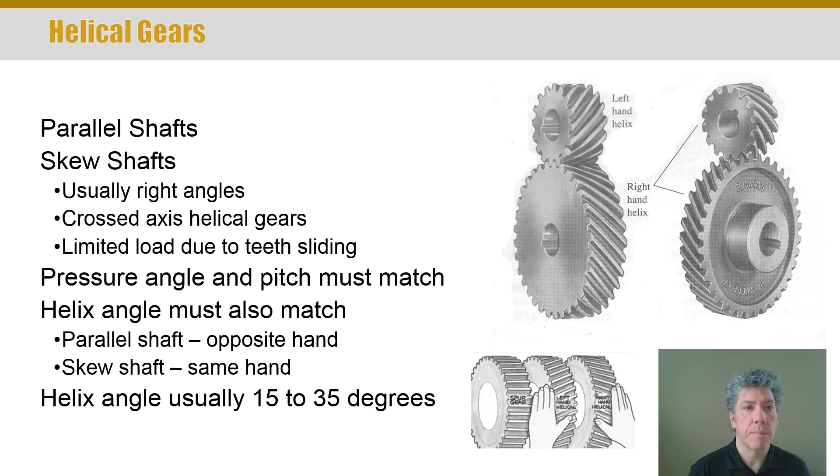Now, some of the advantages of a helical set: number one, you have a higher contact ratio, meaning there are more teeth in contact at the same time. This should make sense—if you consider the helical gears on the previous slide, some of the teeth actually had part of the tooth in mesh and part not yet in the mesh area. The high contact ratio just means there are more teeth in contact. And because of the way the teeth are angled with respect to the gear body, the pressure or force is applied from one tooth gradually along the face of the tooth.

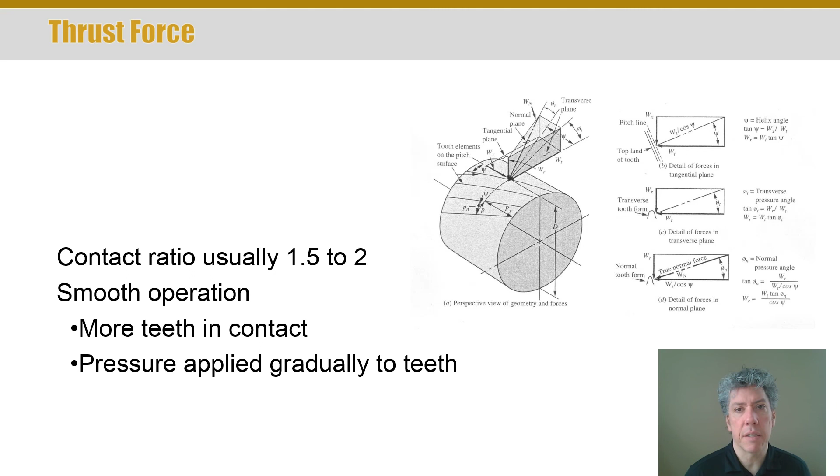So this is a huge advantage. Now it does result in a problematic byproduct: the angle of the tooth causes a force on the gear that makes it slide along the length of the shaft. That's problematic—we don't want that to happen, obviously. One way to overcome this is to simply include two separate helical gears in one body with two separate handedness—a right hand and a left hand—so that the thrust forces cancel out.

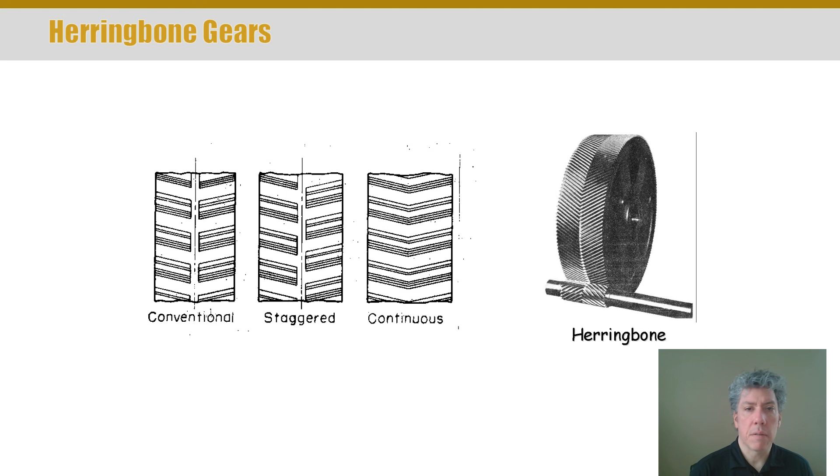These are called herringbone gears, and those were the types of gears you saw at the beginning of the slide, the picture of the very large gears. There are conventional herringbone gears, staggered, and continuous, and depending on the application you can choose what you need. Continuous is the most difficult to make because getting into that point in the middle is hard. Staggered gives you a bit more advantage in terms of smoother contact and engagement between the teeth. Conventional just makes two separate helixes and puts them together essentially. So that's herringbone gears, but they're not especially common.

Let's consider the forces on the helical gear teeth. This is a really important figure to wrap your head around. What's being shown here is the body of a gear without the teeth themselves—they're just lines on the surface of this cylinder to represent the teeth. Now remember that we always put oil between gear teeth, and so the gear teeth can't have any friction forces.

So this is the normal plane. It's pulled off down here at the bottom. And if you were to look at this plane straight on, or square to it, you would see the true normal force—that's that dashed arrow in the middle of the rectangle there. And notice that it is at an angle, phi. Now that phi has a subscript n, and that is called the normal pressure angle. So that's an angle in the normal plane, so it's a normal pressure angle.

Now the part of what we care about is the horizontal piece of this. Okay, so if we take the normal force and break it up into horizontal and vertical components, we'll get a radial force, and that radial force tends to push the gear away from whatever it's meshing with. And then we get a horizontal piece that is almost what we want. Now notice this horizontal piece is not exactly in the direction we want. There's a component of this horizontal force that tends to generate the axial force. And part of this is the tangential force, which is the whole point of having the gear in the first place. But there are some equations here to relate the tangential, normal, and radial components.

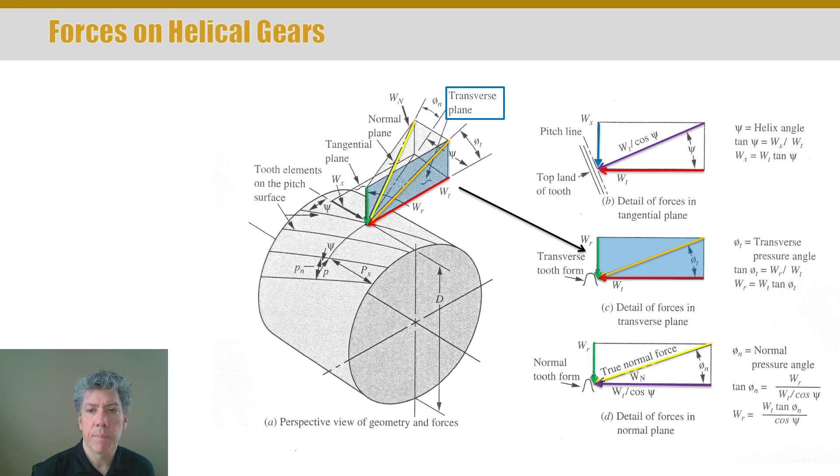Psi is the helix angle of the teeth. Phi is the pressure angle. That's due to the involute tooth profile.

But notice that you would see two different forms of the teeth depending on which plane you use to cut it. For example, if you use the transverse plane, the one we still have highlighted in the middle, you'll see a tooth that is thicker, because you're cutting the tooth at an angle to the tooth, so it will look wider. And that's expressed in that little form down and to the left where all of the arrows are pointing to in that transverse plane.

In the normal plane, you'd see the true profile of the tooth because you're cutting the tooth normal to the tooth itself. So Wn, some terminology just to recap, is the true normal force.

Wt is the tangential force - again, that's the whole reason for having this gear in the first place. W sub r is the radial force, and it is a side effect of the involute profile of the tooth. And the axial load, W sub x, that axial force, is a side effect of the helix angle and the fact that these teeth are not like spur gear teeth - they're at an angle.

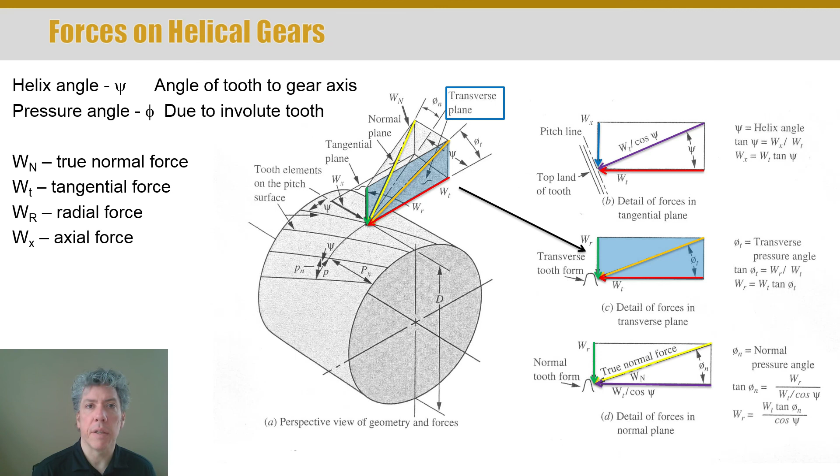Now how do we design these teeth? Well, we have to consider bending stress and compressive stress in these teeth as well. And so we're not really calculating the stress itself - we're approximating the stress in the gear teeth, and that's why we call it a bending stress number and not a stress. Now the geometry factors, J, are different for helical gears than they are for spur gears.

So you'll have to note my little text down there at the bottom that says on page 385 through 387 you'll find several tables that give you the geometry factors J for helical gear teeth. Now the K factors - the overload, the size, the velocity - all those factors are exactly the same as they are for spur gears. So we can just reference back to that information in the previous chapter, chapter 9, and use it.

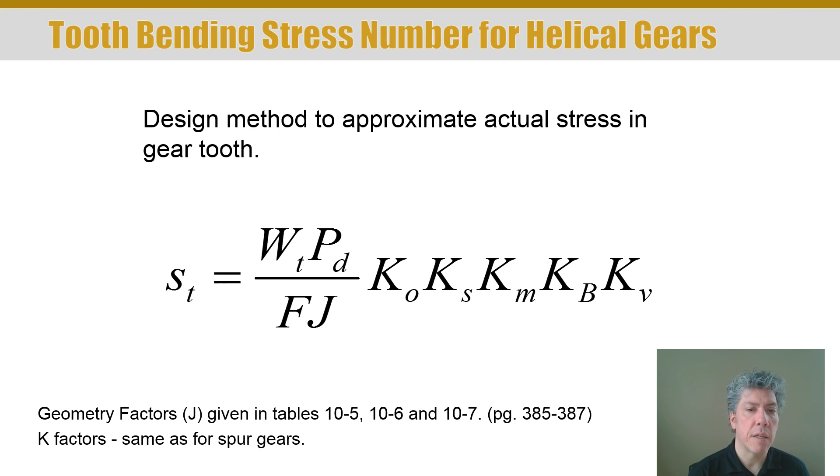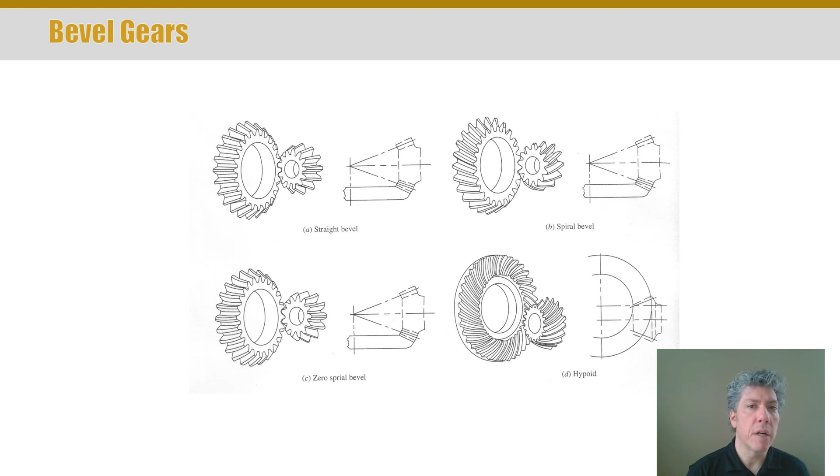Bevel gears are another class of gearing that we're interested in designing. There are straight bevels, spiral bevels, zero spiral bevels, hypoids, and other flavors, if you will, of what you might have thought were just bevel gears. We're not going to study all of these. Here's some pictures of what these things actually look like.

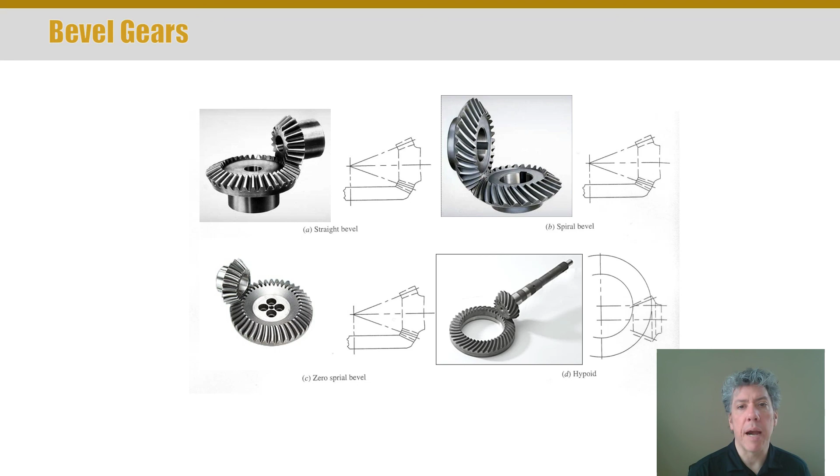We're going to concentrate our efforts on the straight bevel gear. That's the one that we'll be able to design. The others, we won't find any design methods in our class for these.

Now bevel gears usually intersect at right angles. They don't have to - you can make them intersect at other angles, but that's not common. And if both gears are the same, then the whole purpose of having bevel gears is to turn a corner. In that case, they're called miter gears, so they would have the same number of teeth and so forth, and not give rise to a speed increase or a speed reduction.

Now if there are two bevel gears meshing together and they're not at right angles, they're at some other angle, then they're called angular bevel gears. The U.S.

The standard bevel gear system is the Gleason bevel gear system. It's based on a 20-degree pressure angle.

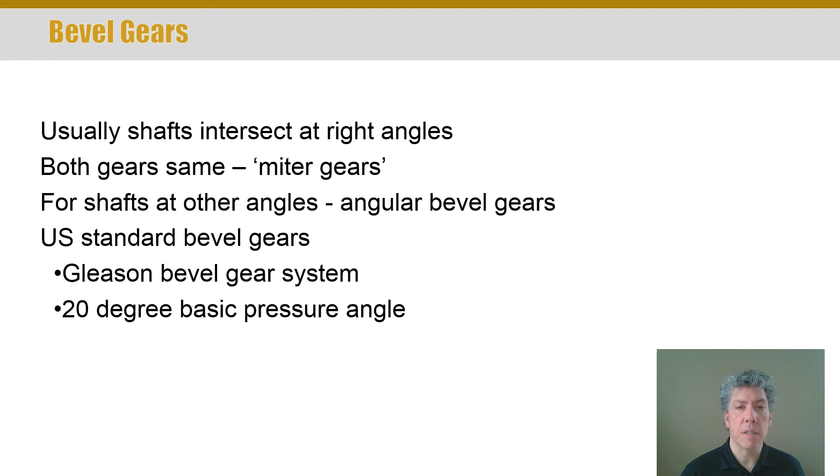One thing to note about bevel gears that's different from spur and helical gears: bevel gears are the first class of gearing where the pinion and the gear have to be matched to one another. You can't go buy a bevel gear of one size that has, say, 48 teeth, and say that pinion I bought with 12 teeth won't work, I'm going to just move it up to an 18-tooth pinion. That doesn't work. The geometry for bevel gears doesn't work that way. You'll see that in the example problems as I design a bevel gear set.

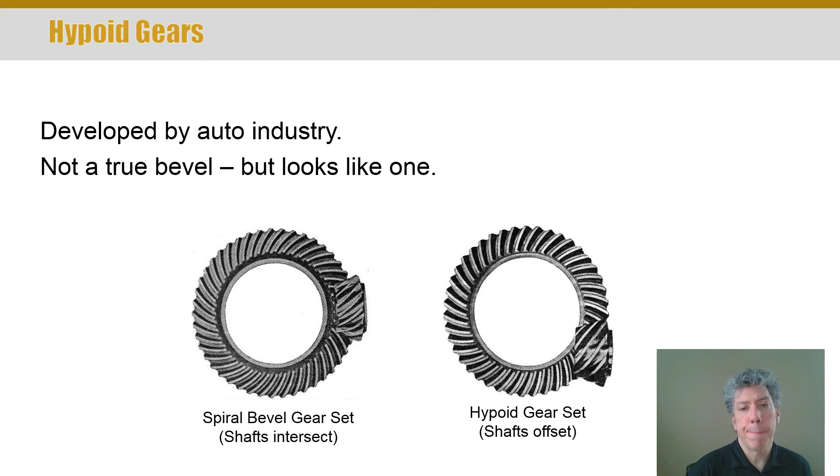We are interested in the forces on the bevel gear teeth, because those forces are what would tend to cause the teeth to fail. So you have to think through this.

If you look at the figure, not the photo but the figure on the lower left, you'll notice the gear has 48 teeth and the pinion has 16 teeth. The symbol gamma is the cone angle, or the half cone angle. Both the gear and the pinion have teeth on the surface of a cone, and that angle gamma is important. In the geometry section of your text, where they discuss the geometry of bevel gears, they use lowercase gamma for the cone angle on the pinion, and uppercase gamma for the cone angle on the gear. Make sure you're familiar with the geometry.

That's a general approach to bevel gears. They usually use lowercase letters to indicate the pinion and uppercase letters to indicate the gear, at least in the context of bevel gears.

Now, if we extract these two gears and draw a couple of views so we can look at them from the top, face on, or from the side, go over to the right-hand set of figures. You'll notice a front and side view of the pinion, and a top and side view of the gear. If you think about how these two touch each other and mesh together, look at the side views of both and ignore the front-on views for the moment. You can imagine the pinion moving down, or the gear moving up, to mesh with one another.

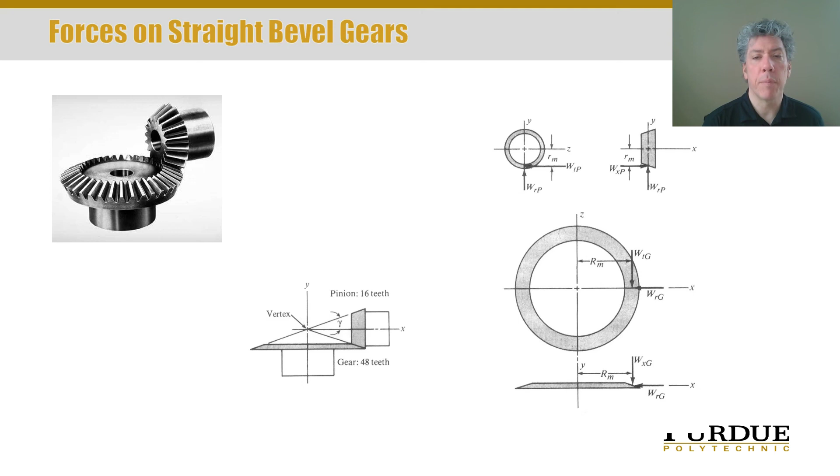The behavior of the gears depends on how well they are supported. Bevel gears lend themselves to being cantilevered, put out on the end of the shaft, and the ends of shafts can deflect more than the center of the shaft where it's straddled. So one thing you can actually do is straddle mount bevel gears, and that's the ideal situation.

So what you see here is a bevel gear in cross-section near the lower part of the figure. It's riding on a shaft, which is connected to a bearing called D, which goes to the housing to support any loads. At the other end of the shaft is bearing C, and those two bearings straddle the gear, supporting the shaft.

It's not obvious, but the housing around bearing C, just that bit of crosshatch out at the edges, would somehow connect to the rest of the frame holding all this gearing and shafting in place, and connect back to the same frame holding bearing D in place. This is a straddle mounted gear.

Similarly, in this case, the pinion is straddle mounted. Look to the right and you'll see bearing A and bearing B riding on the shaft, with the pinion riding between those two bearings, making it straddle mounted.

So this is the ideal situation, but it's not always the case. You'll notice in the example problems that how the bearings are mounted - whether straddle mounted, cantilevered, or one of each - makes a difference in the design of the gearing and what's required.

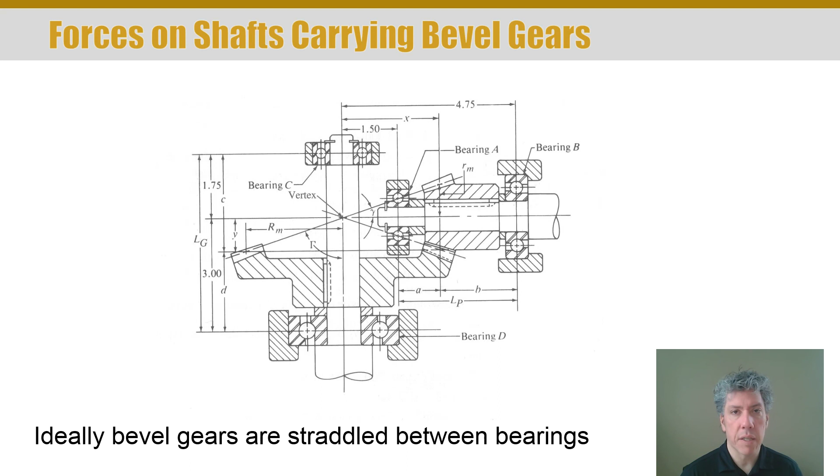The first thing to do to solve these problems is to draw free body diagrams showing the tangential, radial, and axial loads applied. Then calculate the bending stresses and deflections, calculate the loads on the bearings, and ideally bevel gears should have stiff shafts and rigid mountings.

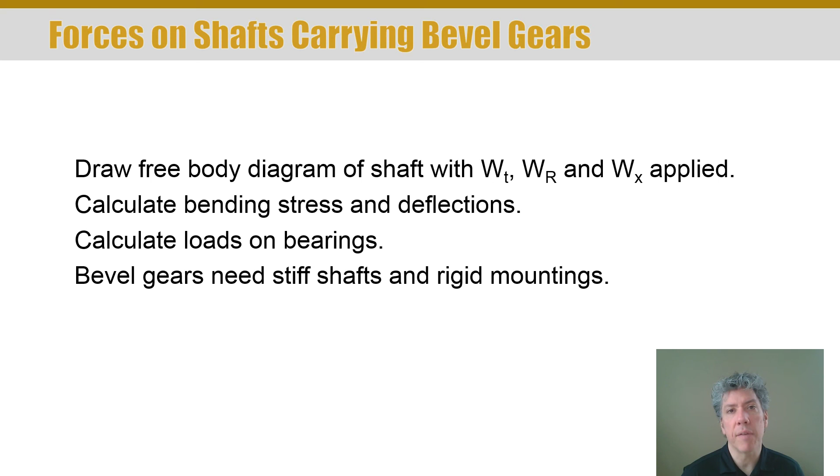The first three points here are with respect to sizing a shaft. We already studied shaft sizing in the course, and I didn't go through much detail about how you would calculate loads from gears, so we're backfilling that now. These loads applied to the gears are also applied to the shafts, and the shafts have to resist those loads.

What about the stress in bevel gear teeth? You'll notice the stress equation here is a little different - this is the bending stress, not the contact stress. But it's a similar procedure to what we have for spur and helical gears, just that the factors are a little different.

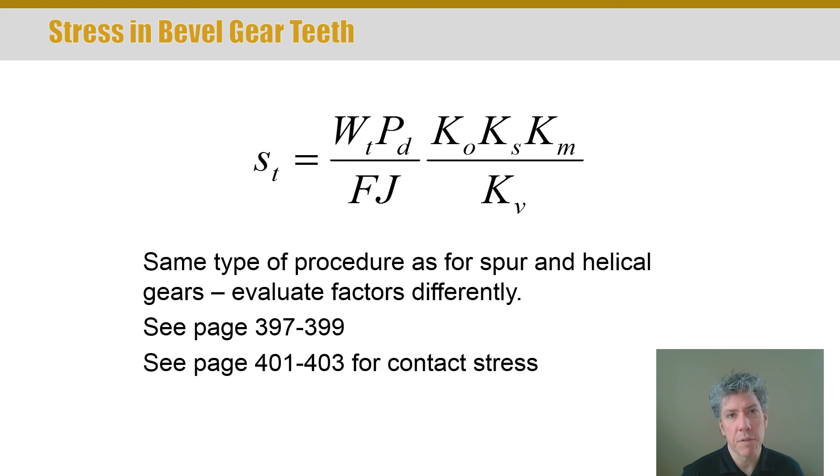You'll need to see the page numbers I've referenced, and we'll go through these in the example problems. You may want to tab them for the time being so you can find them. The setup is similar but a little different - some factors are the same, some are different, and we'll explore those details in the example problems.

That's not the worm gear - that is called the worm. The threaded item is called the worm. The item that has teeth, like a gear, is called the worm gear. So that larger round item is the worm gear.

Now you might look at this and say, okay, that's interesting, but how on earth would I calculate the speed ratio between the two? You might be tempted to count what appears to be the number of helixes on the worm.

What you do instead is trace one helix all the way around. That is one tooth, or effectively one thread. Now, it is possible to have more than one helix on the worm.

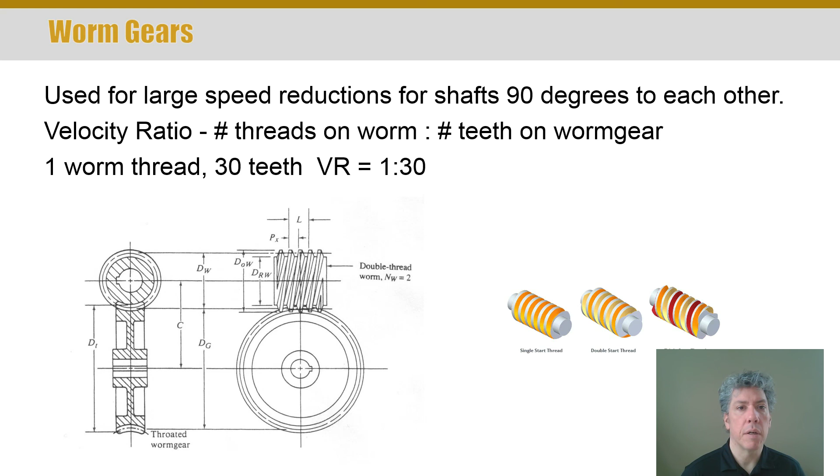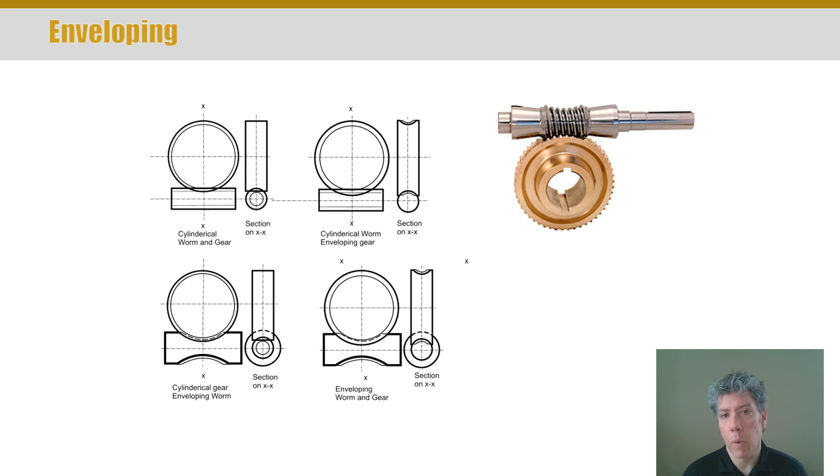Notice that it's very rare to see the upper left CAD example where neither the gear nor the worm envelop the other. If you have a Lego set with gears and worms, you'll notice that neither one envelops, and that would be an example of this. However, what is exceedingly common is to have the worm gear envelop the worm. That is very, very common, and it's hard to find a set that doesn't have that feature. In fact, the lower left-hand example is rare for that same reason. Simply having the gear teeth envelop the worm is beneficial and frequently adequate. So the left-hand column of CAD drawings is not common. The two on the right-hand side are much more common. The upper one is what you normally get, and the lower one is expensive.

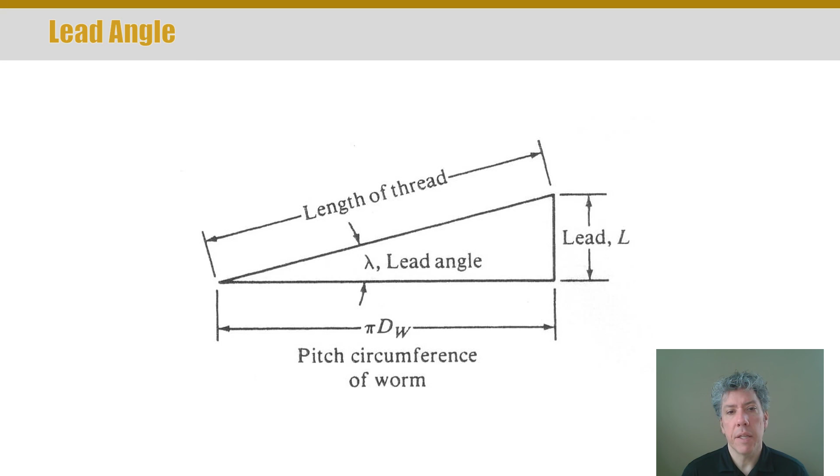The lead angle is defined by imagining taking a thread from the worm and unwrapping it. One complete revolution of a thread, unwrapped, forms a triangular shape with the length of the thread as the hypotenuse, and the lead angle defined as lambda. The lead is on the right, the height of the triangle, which is the distance from the same point on the thread to the same point one revolution later. The pitch is just pi times the diameter of the worm.

These sets typically operate with the worm turning the worm gear. You don't have the worm gear turn the worm. In other words, you don't back drive these because it's not practical. It doesn't work, there's too much friction, and it simply can't be done.

In fact, they can be set up to be self-locking. Think about it: what if you're riding an elevator? What kind of gear set would you like pulling your elevator along? Probably a worm gear set. The reason is that if the motor fails, say the shaft on the motor breaks, even with the gear sitting there in its bearing, all the load from the elevator is trying to make the worm turn, and it simply can't—there's too much friction. So usually these are self-locking.

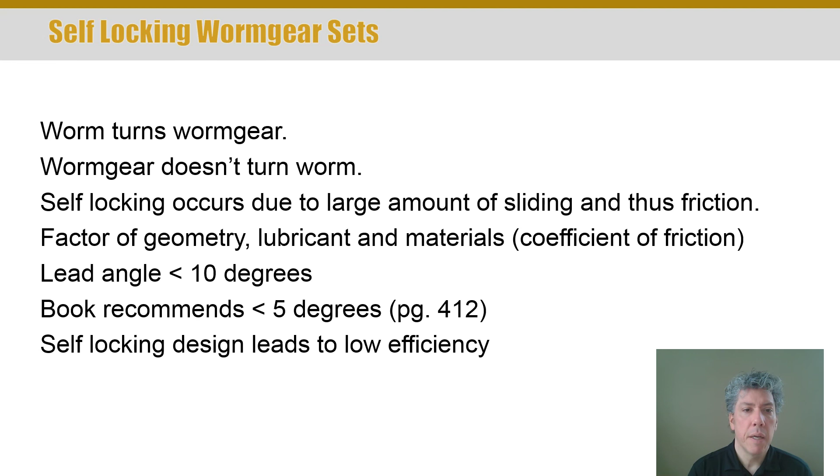Whether or not they are self-locking is a function of geometry, lubricant, materials, and therefore the coefficient of friction. Typically the lead angle is less than 10 degrees or so. The book recommends a lead angle less than 5 degrees, but efficiency depends heavily on that angle, as you'll see in examples. Self-locking design does typically lead to low efficiency.

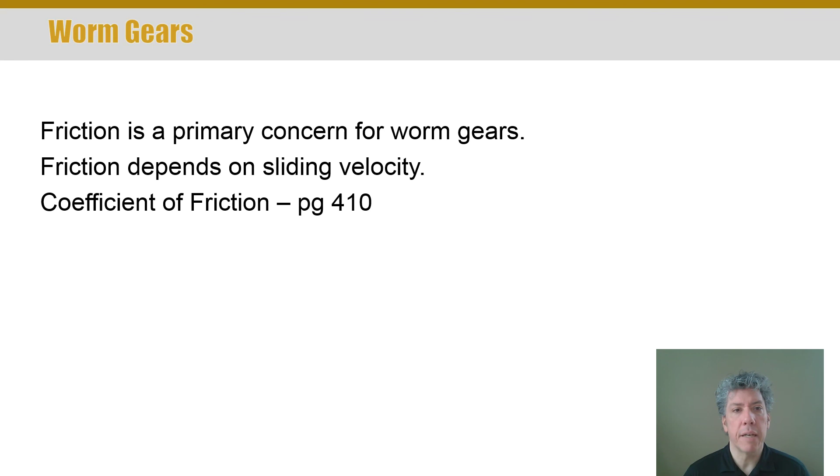So friction is the primary concern for worm gears when designing a worm gear set. The friction depends on the sliding velocity, and there's a coefficient of friction graph you need on page 410, so I wanted to reference it here.

The amount of power you put into a worm gear set is not the amount you get out. As a matter of fact, worm gear sets are notoriously inefficient, so we have to think about how much power loss there is. Power goes in, some mechanical power comes out, but there's significant power loss. The efficiency of these types of sets is simply the mechanical power out divided by the power in—the rest goes to heat and loss.

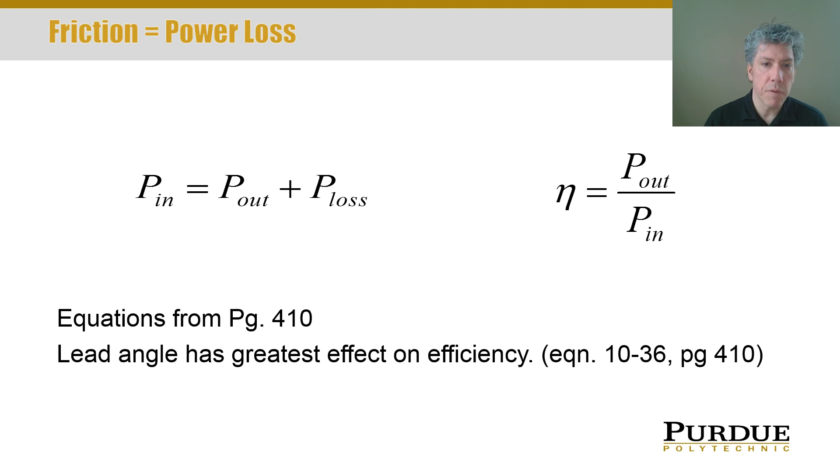There are equations for this, and page 410 is particularly useful. You'll see that in examples again.

Worm gear systems are limited by pitting, wear, and thermal considerations. In other words, they generate so much thermal energy that they can overheat. In fact, you'll notice a lot of gear casings for worm gear sets have fins on them for dissipating heat.

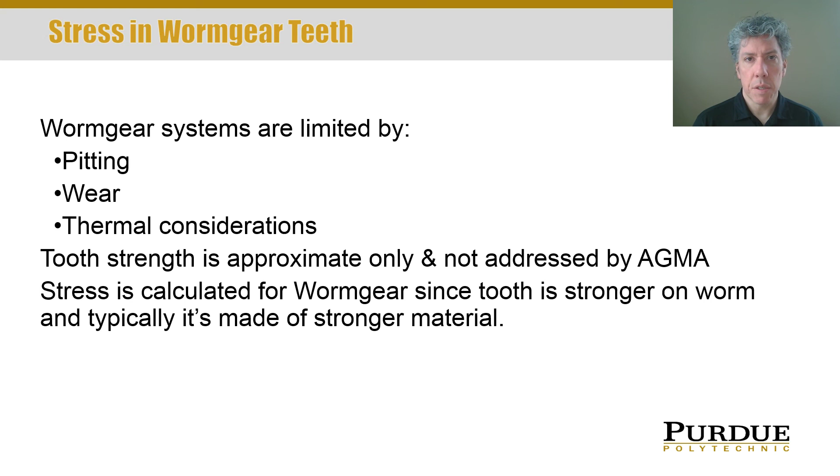The tooth strength is approximate. The method we're using isn't addressed by the AGMA. We make the worm out of the stronger material because we're better at calculating stresses in the worm gear, so we assume failure will occur in the worm gear before the worm, and that way we can predict and control it, making our worm sets last a predictable amount of time. That's also the reason for having steel and bronze running together, for wear considerations.

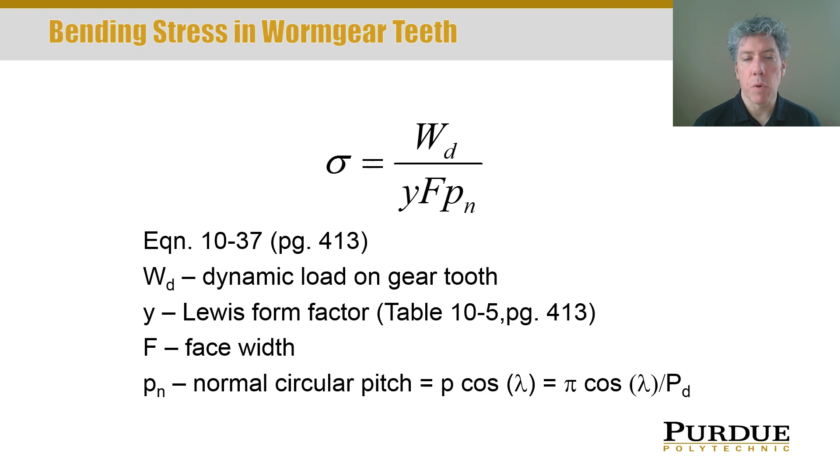This bending stress we're using is just approximate. There are some terms here: the dynamic load is included, the Lewis form factor is Y, which harkens back to the Lewis equation for spur gear teeth. The face width of the gear—not the face width of the worm, but the face width of the worm gear—is F, and Pn is the normal circular pitch. You'll see all of this again in example problems.

Now, how do we deal with surface pitting, not just bending stress of the teeth, but also the surface forces and contact stresses? Here we calculate what's called a rated tangential load, W sub TR. As long as the rating for the gear is greater than the actual load applied to the gear teeth, then it's a good design.